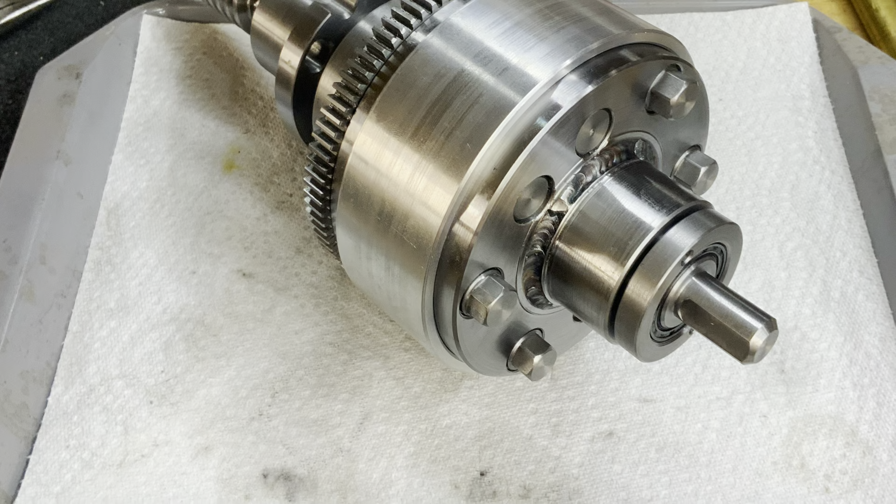I want to share progress on the changes to my hobbing machine spindle and the addition of a spur gear differential. I hope you enjoy it.

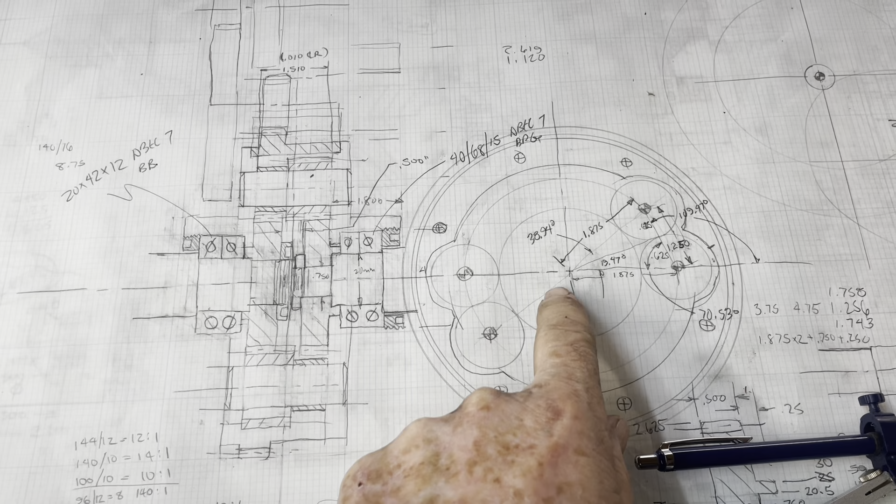This is the layout for the spur gear differential that I'm working on. The whole thing is only about 6 inches in diameter. Basically, there's two 40-tooth gears in a stack here. You can see those right there. And then there's four 20-tooth gears that form the differential part. These gears mesh with each other, but each of these gears only meshes with one of the two 40-tooth gears.

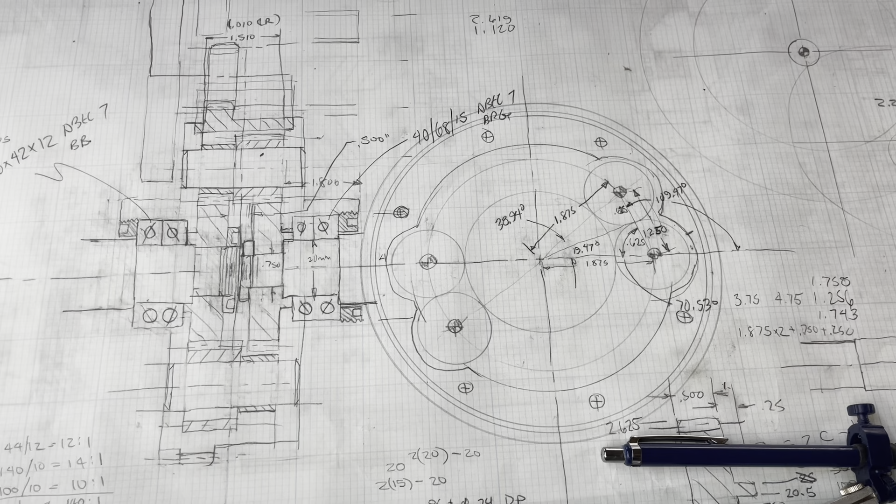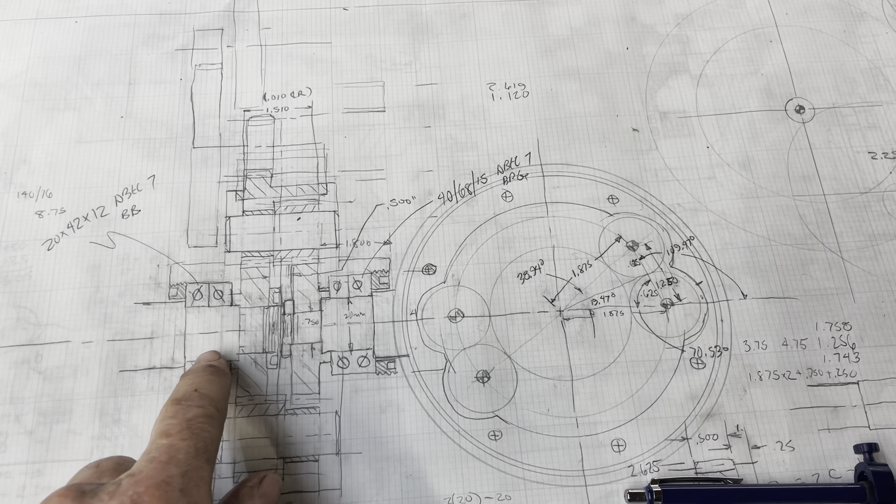This is not an uncommon differential setup. I'm kind of sorry I didn't think about this before. I think it might have made some of my other stuff a little easier. So basically there'll be a hub and a plate, and another hub and a plate. Each one of those hubs will carry a back-to-back pair of angular contact ball bearings, ABEC 7 bearings.

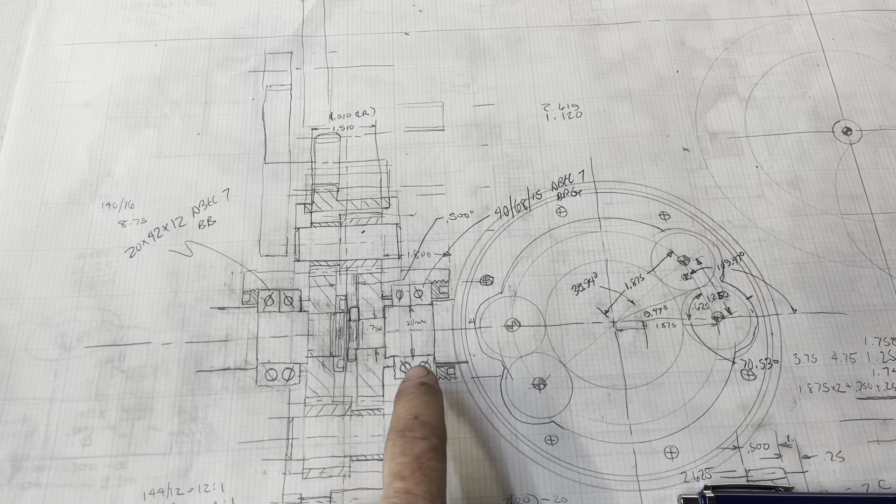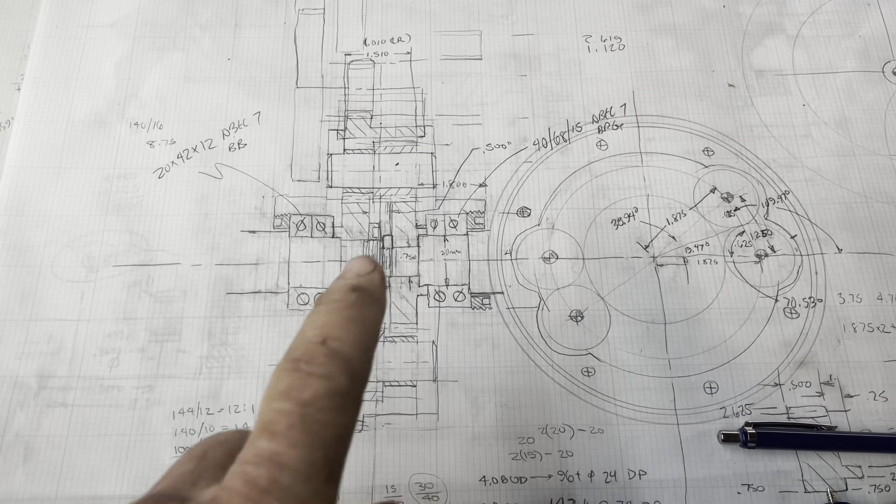This one here will be larger. It's not drawn that way, but it's going to be like a 2.5-inch bearing. And these are going to be smaller here. These just carry the input shaft. This will ride on the old input shaft, and there'll be a new input shaft here that carries the flywheel and the input from the index train.

I am here today to talk about the assembly of my spur gear differential, which is going to replace the bevel gear differential that I lovingly screwed up by putting it inside my spindle assembly. It's all part of life's learning process. So I'm going to show you this. We're going to put it together, and then we'll install it on the spindle in a later video. Part of the reason is I kind of cleverly made this almost but not quite unassemblable on the actual machine. So I'm going to have to do a little more fiddling, but I'll show you what it looks like when we get it all together.

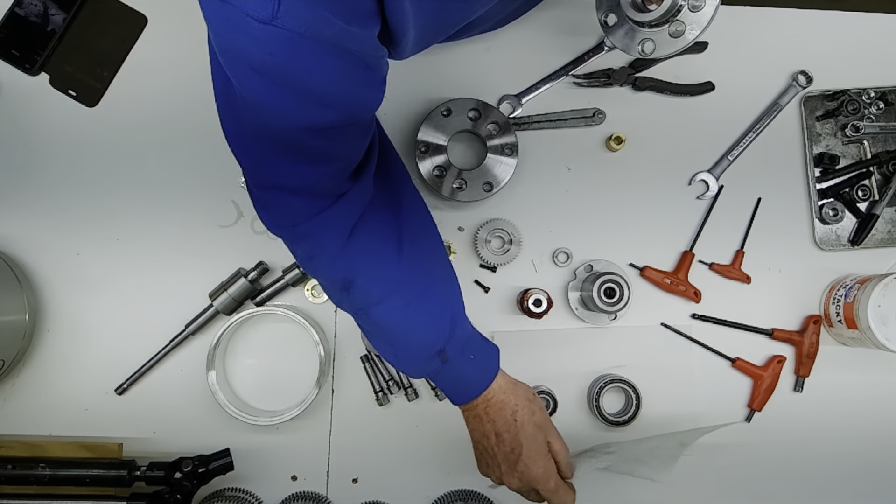So the way this is set up, there are two housing flanges. This one goes around the input shaft. This one goes around the output shaft. And we'll start by putting that together. These are ABEC 7 precision bearings. These come from China, actually. They're Mochu brand. They're available through Amazon. And I have to say, they're pretty doggone good for the price.

I mean, these bearings here are probably about $22 or $23 a piece, which is more than the cheap bearings that they sell. But these things are incredibly precise and smooth, and I'm a big fan. If you bought from SKF or one of the European brands, you'd be paying probably $600 or $700 per bearing for these things. Now you might be able to tell the difference, but I can't.

So anyway, these are going to slip down into that snugly fitting hand press bore. With the arrows pointed outward, that tips the angle of contact toward the outside. Let's see if I can do this. The contact angle of the bearing should go like this. You want the spread on the shaft side rather than on the support side.

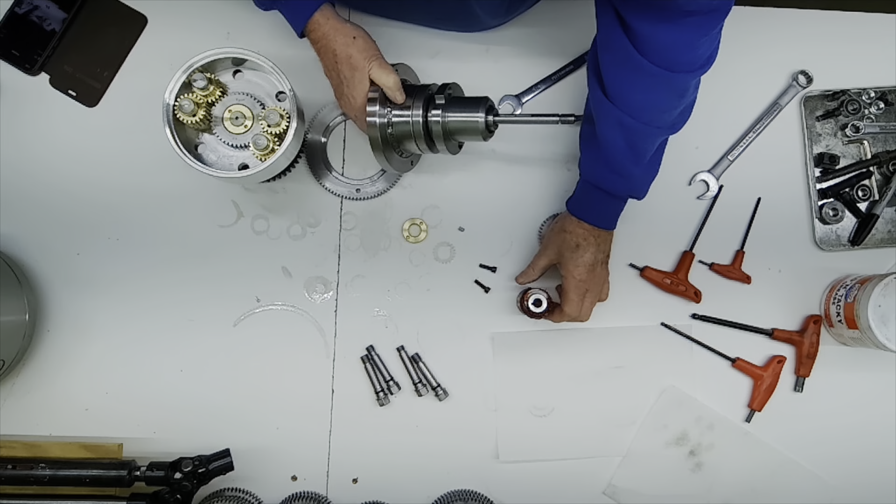You can put the bearing spindle on the outside, or the bearing thing on the outside, the shaft support, and then it's got grease on it because I was just test fitting it. This one's got a spacer ring and a little short key.

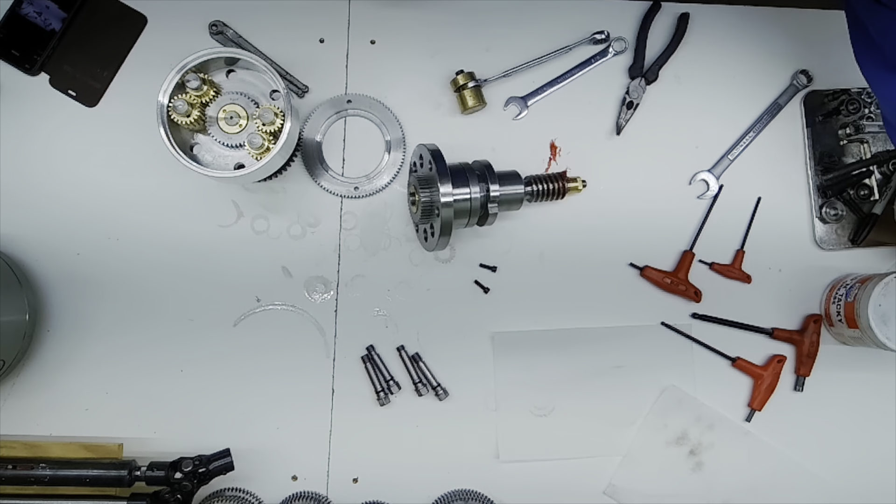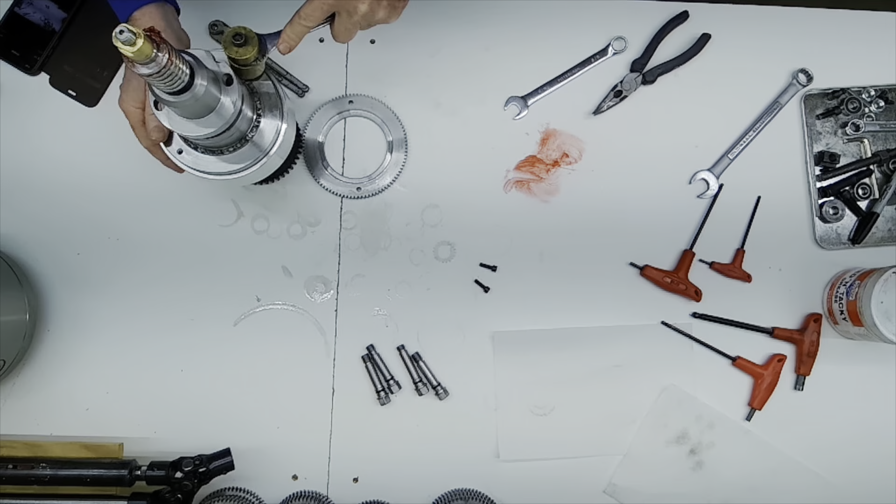Now this is probably the fiddliest part of this whole thing, which is getting this on in the right way. And I put alignment marks on the housings to do this. Well, I think it's meshed. On. Uh-oh. Crap. Sigh.

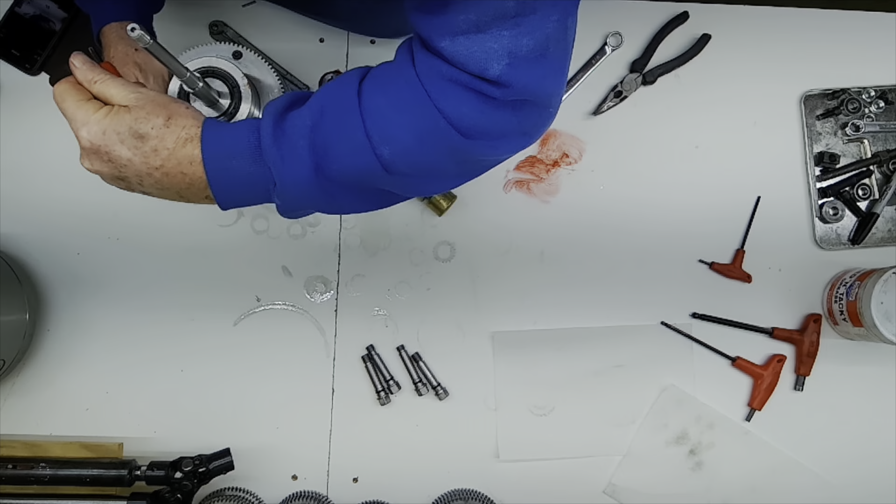This is the input gear that goes on the drum of the differential. So the signal from the lead compensation train comes in through this 90-tooth gear. Okay, let's try that again. Okay, key, the gear.

Okay, now all we should have to do is put these screws in. Yeah, phooey. Feels like it's not quite. Oh, there we go. Still turns, that's a good sign.

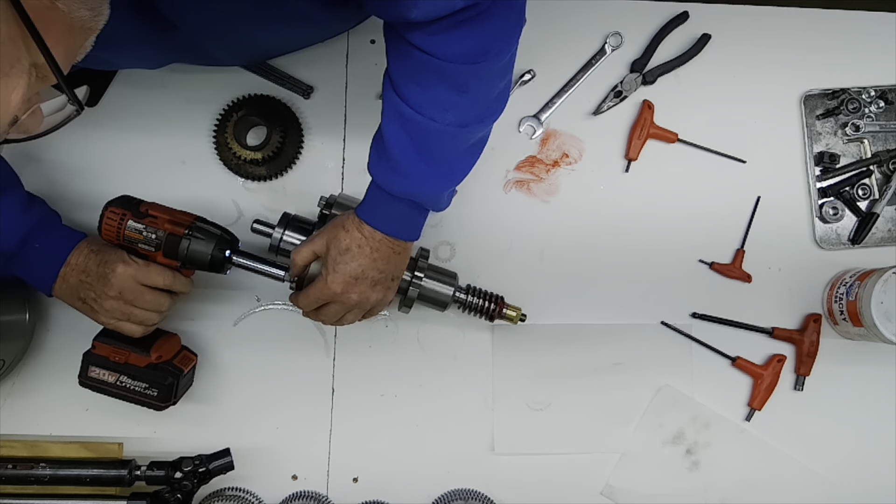And that's it. So that's what the, I suppose you could call it a pancake differential, a spur gear differential. This design used to be fairly common, I guess, in some of the early automobiles. Just because, for the same reason I made it, it's relatively easy to make. You don't have to fuss with it too much to get a decent differential. It's a pretty good differential for a machine tool.

I think overall, the bevel gear design is more compact from a diameter standpoint. This is 6 inches diameter on the outside, about 2.5 inches thick in a functional sense. Then this goes in right where the worm drive for the input, that used to be the input, goes, and the U-joint for the index train goes here.

And then I have to make a couple of changes to the side plate on the spindle housing to provide the gear input from the other side for the lead compensation. But this works pretty good. It feels good. It doesn't have any catches or tight spots. It's not bad. Not bad.

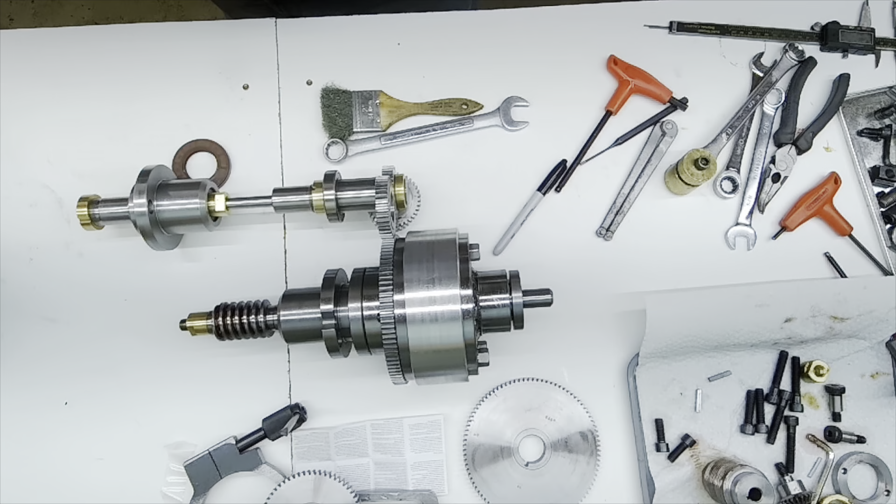Well, this is kind of a trial layout of the lead compensation train. This is the differential shaft, and that drives the 40-to-1 worm gear. This is the lead compensation shaft that used to be the lead compensation worm drive, but I've taken the worm out and replaced that with a screw there to preload the bearings on this side.

And I've added a little half shaft here that will be attached to this shaft by a drive pin or maybe a slip pin arrangement, and it's loaded against this class 6 sealed bearing here that will kind of be an outboard bearing for this bearing support system here. And then that goes through a 30-tooth gear here through an idler to the 90-tooth gear that's on the back of the differential.

And this is the rear plate of the spindle assembly, and this is the front plate here. So this kind of spans across the space, and then the drive gear for the spindle goes here.